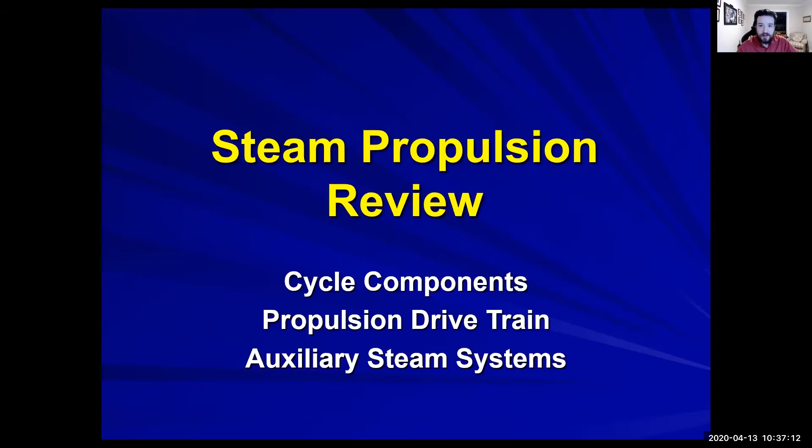All right. So any other questions before I kind of start pushing us through where we're going to go with today?

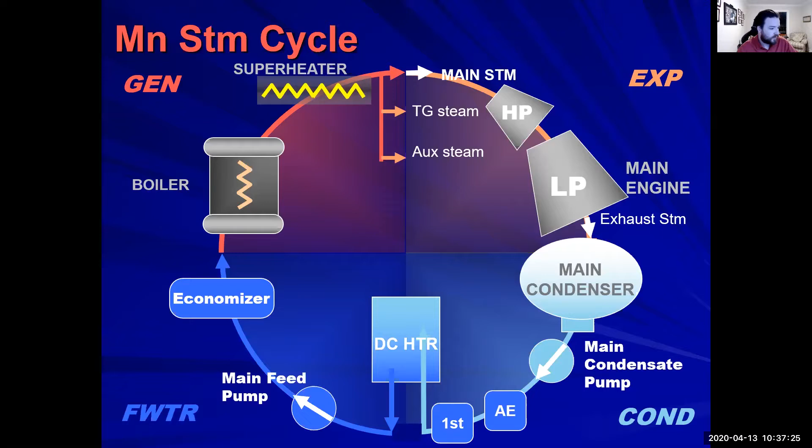So next week's test is just like the three things we just learned. It's not going to be cumulative. So test 3 is going to be 50 multiple choice. It's going to be on Blackboard. It's going to be in the same format that our other tests and stuff have been in.

Now, it's only going to cover -- not refrigeration, I wish. It's going to cover electricity, hydraulics, and steam. All right, so make sure you study up on those three things. I would, if I were you, download all of our PowerPoints that we have already, so that way you have them on your computer and you're good to go with no problems on your end.

All right. What else? I think that's going to be it. That's pretty much it we have today. And then so today we're going to be finishing up with the lesson. We don't have that much left. We have slides 23 to 25. So not a whole lot there.

Expect the quiz Wednesday. And then Wednesday we're going to be doing review for test 3. And then a little bit of information about cruise and whatnot, and what to expect, and any questions you guys may have on that. Because unfortunately, with the school year ending early, where your IDOs and stuff are supposed to take in and talk about this information, they probably didn't have the time to.

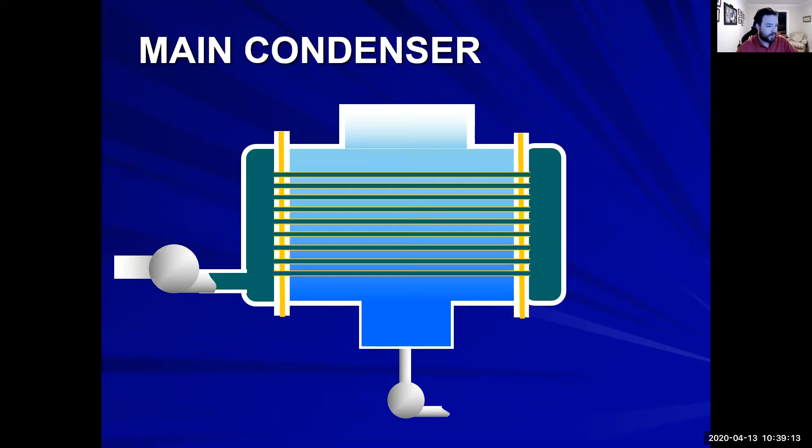All right, so just to review, you have your main condenser, all right, your steam. Oh, come on, where's my pen? There it is. So your low pressure turbine is right here, so your steam is coming through. All right, to keep your head straight on what's happening, you have salt water going from your main circulating pump. You can also utilize something called a scoop, which we do have. And then the salt water goes directly overboard.

All right, it's all gathered into this little tank that's on the bottom of the main condenser. There's an actual level that we try to maintain with the speed of our main condensate pump. All right, this main condensate pump, where are they located? Because we do have two of them. Where are they located in the engine room?

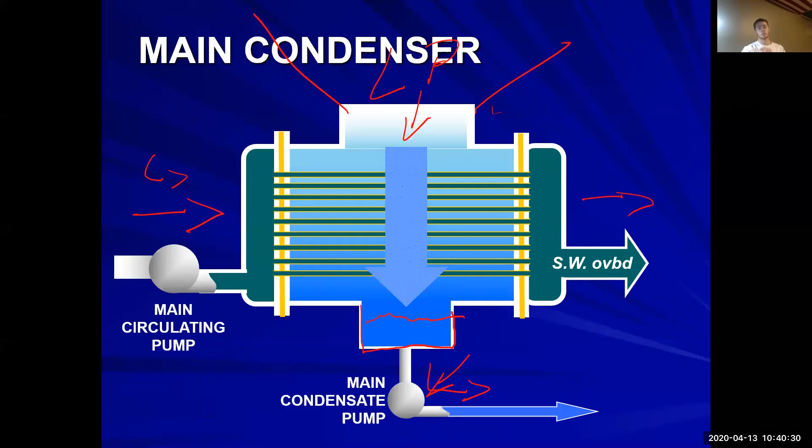Port side, lower engine room, I think. It's not on the port side lower engine room. It is in the lower engine room, but where? Behind the main condenser. Behind the what? Main condenser. What do you mean behind? I'm not trying to be an ass, I just really, that doesn't make any sense on board a vessel.

The opposite side of the shaft. The opposite, okay, there we go. So it's forward. So you have the shaft that comes out here. We have the thrust bearing, which we'll go over in a second. And then you have the main condenser right here. This way goes to AMS. We're in the lower engine room, so there's a door right here, right?

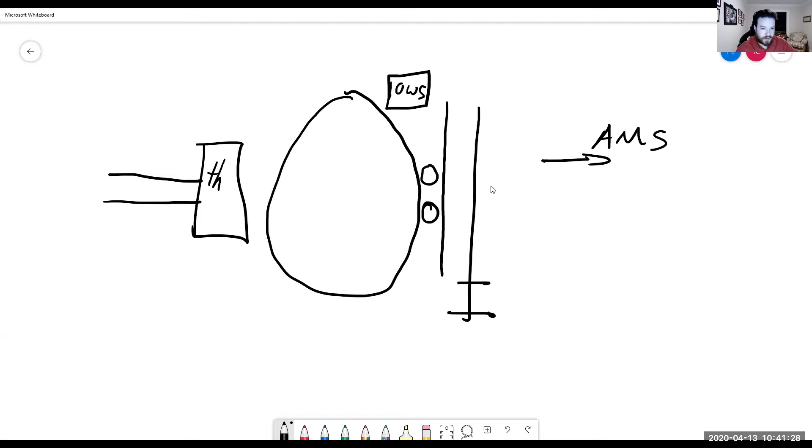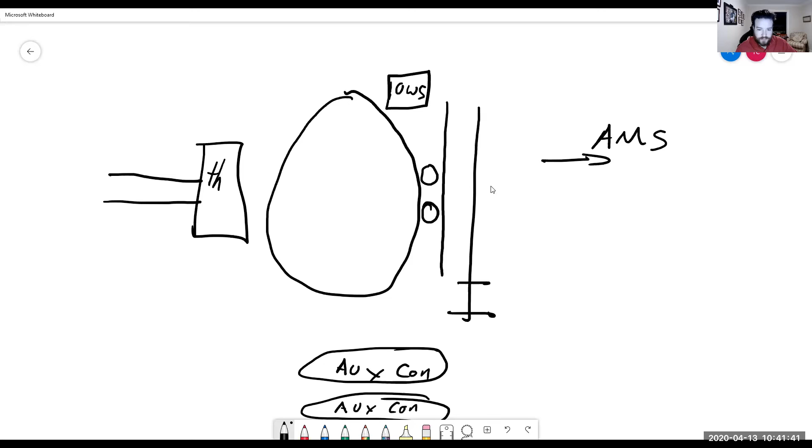And then it is quite literally two pumps that sit right here and here. There's a little walkway that goes right here above it. And then, let's see, we have the OWS over here. Pulling this all from memory. And then we have two auxiliary condensers in the air over here, right? And then we have our feed pumps here, right? One feed pump there, then we have another feed pump, and then we have the import feed pump right there.

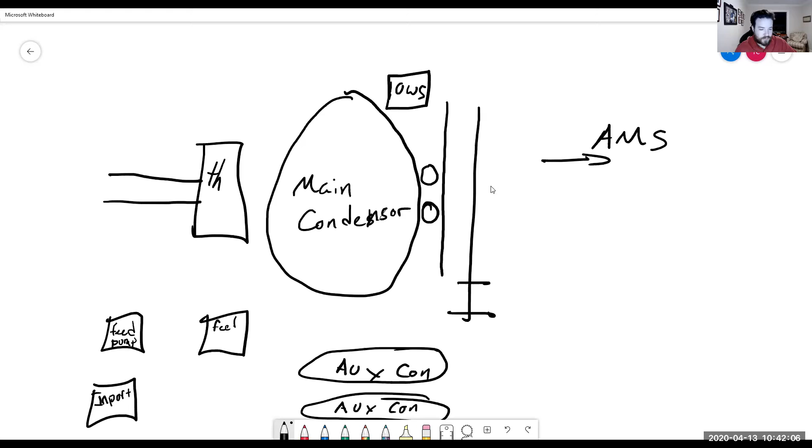We are now a liquid, all right, and we are traveling from the main condenser and we're going into the main condensate pump. We have our air drag line. This goes to the main air ejector, all right.

Does anybody know what was here? Because the main air ejector is not original to the vessel. What did we use before this? Because I'll give you a hint, there was two of them. And there's still, at least one of them is still on board the vessel somewhere.

Does anybody have a guess what we would have used instead of a main air ejector? Like we said, we utilize these things everywhere because they're just fantastic. They have no moving parts. They don't really break. All we use, say again? Something like that. Some sort of vacuum pump or something.

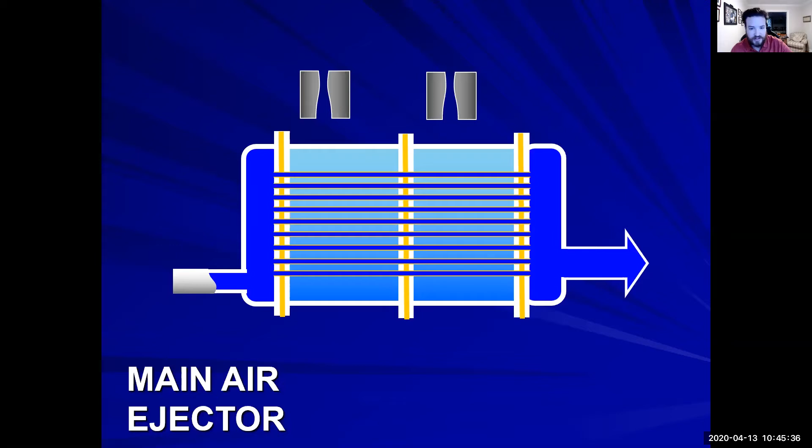So this is coming from the main condensate pump. This is coming from our condenser. This is our main steam line. It's no longer steam, it's condensate. It's a liquid, all right, but it is a hot liquid.

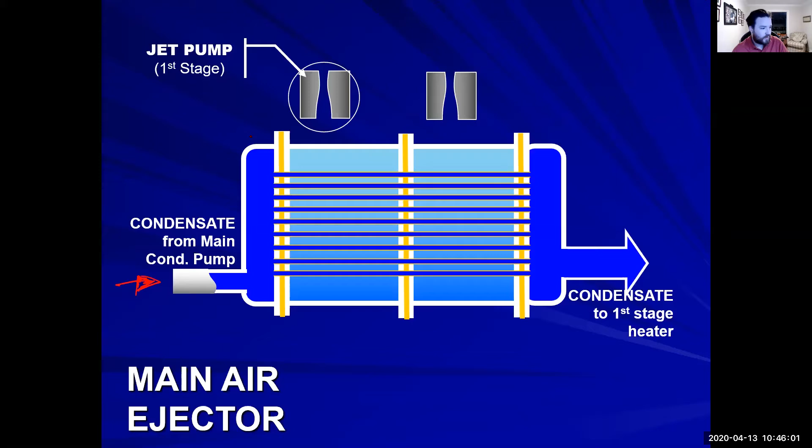What we're trying to do is we're going to try to heat it up a little bit more. We're not trying to cool down our auxiliary steam. What we're trying to do is heat up our main condensate. We're trying to just get as much energy as we can out of it.

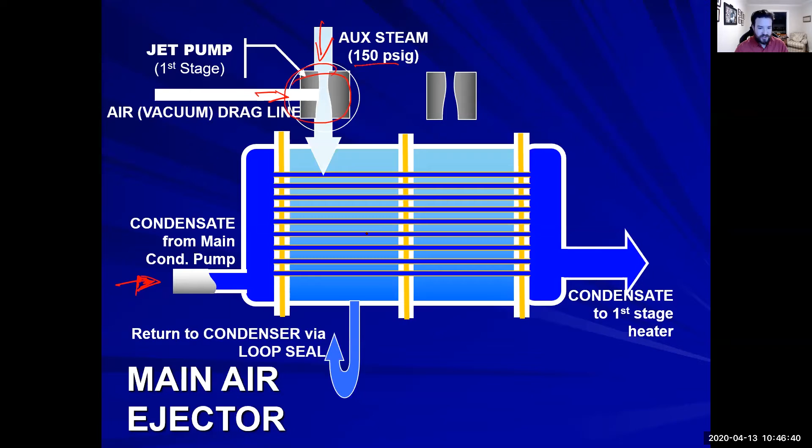So we have our air ejectors. It's utilizing the Venturi effect to drag in any of the non-condensables. We're utilizing auxiliary steam as its prime mover. There's 2 sections of the main air ejector. We have the inter condenser and we have the after condenser, and they're separated via a wall.

So the first portion of it, or the inter condenser, is coming from the main condenser, dragging any non-condensables from the main condenser, and it's pushing it, so now it's all into the inter condenser. It's about 10 to 15 inches of mercury. And then again, any of the non-condensables, so any of the steam.

Say again? Why do you just put this stuff downstairs? No, you can leave it there. Give me 1 second, guys.

The inter condenser is mixed with steam. It has non-condensables and auxiliary steam, 150-pound auxiliary steam. So we want to return any of that steam. It's going to go through a loop seal to the condenser. But we still want to grab those non-condensables out.

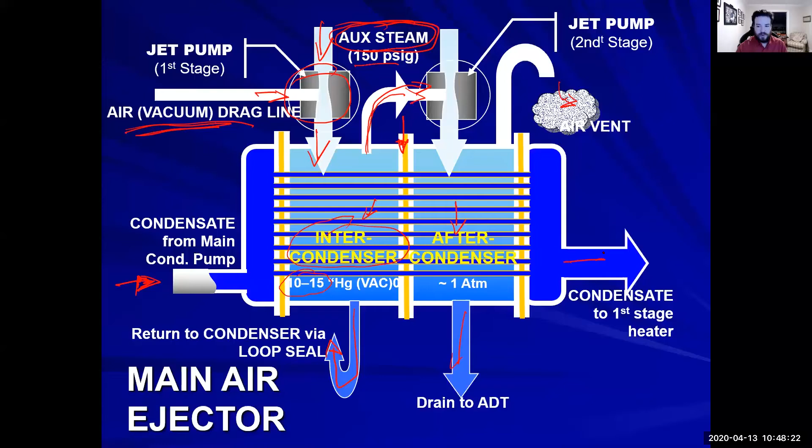So it goes through another air ejector and is pulled out and goes into an after condenser. That drains to the ADT. And any of the non-condensables are pumped out. They go through the air vent. So on the line with our main condensate, it's now heated up a little bit more.

And we go to the first stage heater. This isn't utilized on board the vessel, it's actually bypassed. It still exists, we just don't use it. But it's still important to know about it. So we're coming from the main air ejector.

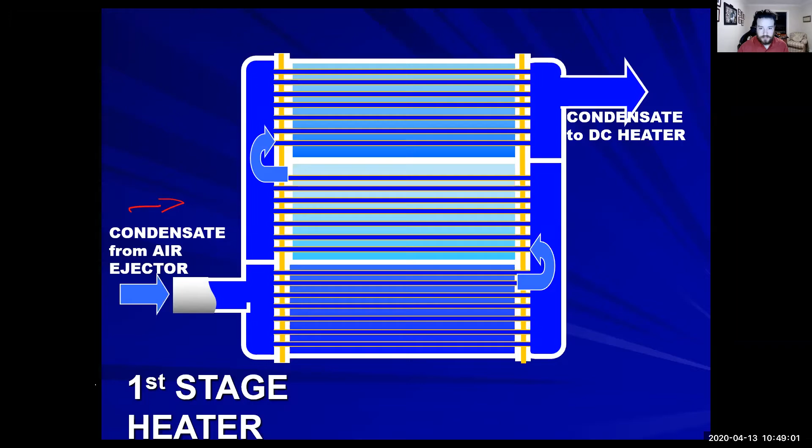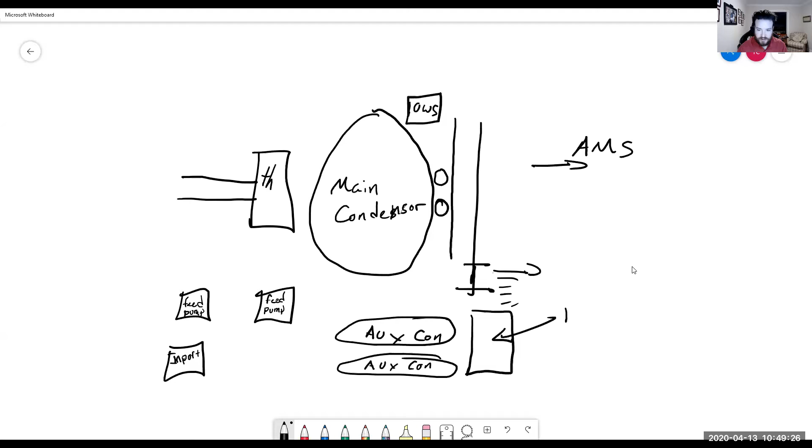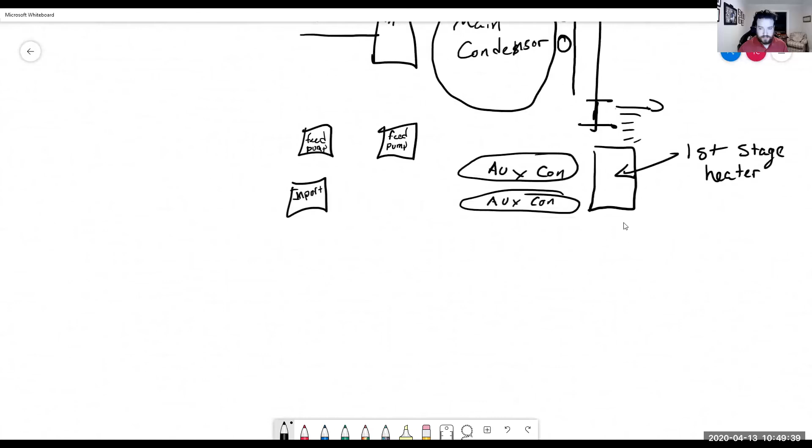What's next to the first stage heater? ADT - that's our ADT tank.

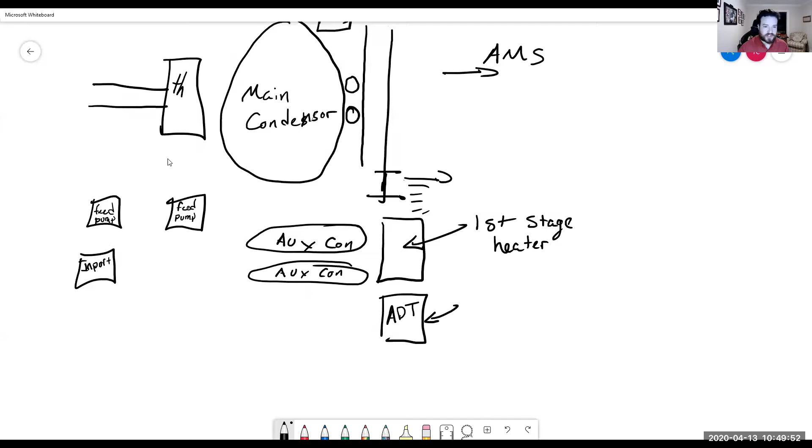Remember what we talked about - always try and keep yourself a little bit oriented on board the vessel. Whenever we're talking about things, like I talk about starboard, and over here is port. A big thing I want you guys to realize is that I've utilized the language that we have to use - use starboard, use port, use aft, use forward. Those words actually mean certain things. And when you go out into the industry, people use those all the time. That's not just something that at Maritime we push just for whatever reason, it's because it's actually used out there. I actually find myself saying it in certain instances of life.

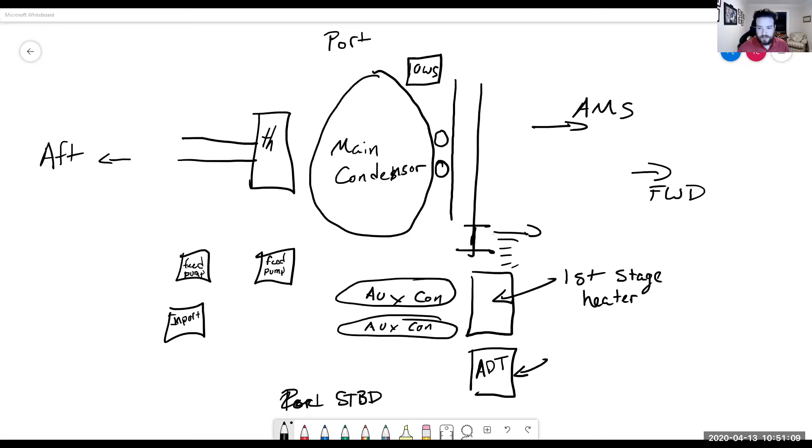So as we go through, we have our first stage heater. Basically, we have 3 heat exchangers in one casing. They are flowing through in this orientation. So it's not just going to flow straight up and out, or cross flow like that - that's not going to happen. It's going to flow - there's a wall that quite literally separates the two. So the fluid is going to be moving through. This is our condensate, and it goes through these sections and through 3 different heat exchangers, basically.

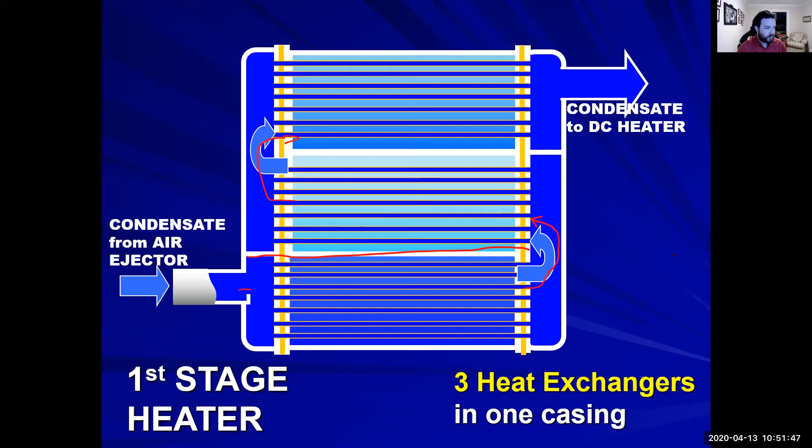So this is the actual first stage in this spot right here, and then this is the first stage drain cooler. So it's basically grabbing steam from certain instances - this is our LP turbine bleed. Any of the extra steam that's coming out of the low pressure turbine is just going to be bleeding off into these areas. And we still want to use that heat from that steam, and that's what this is about. It's just grabbing and utilizing any sort of heat that we can manage, because it's a lot easier to manage heat than it is to create it.

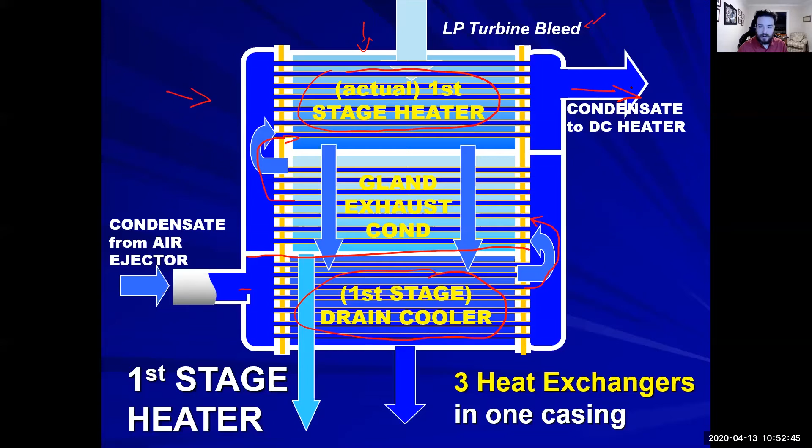Condensate, after it goes through this entire first stage heater, is going to the DC heater. Now, where's the DC heater located? All the way up - that's basically as high as you can go before you hit the stack, right?

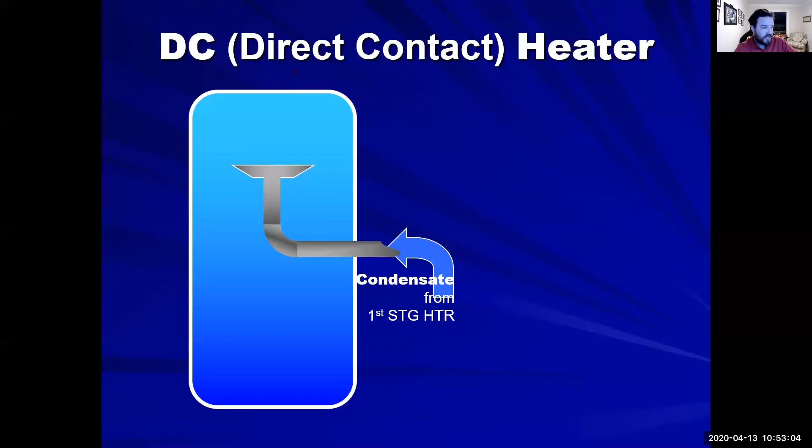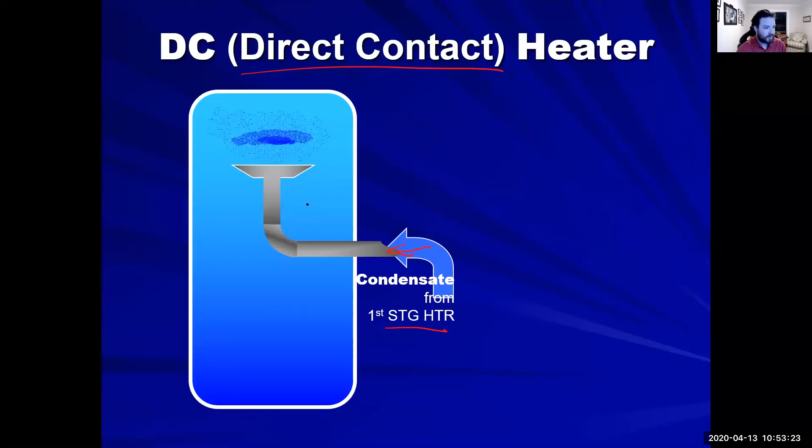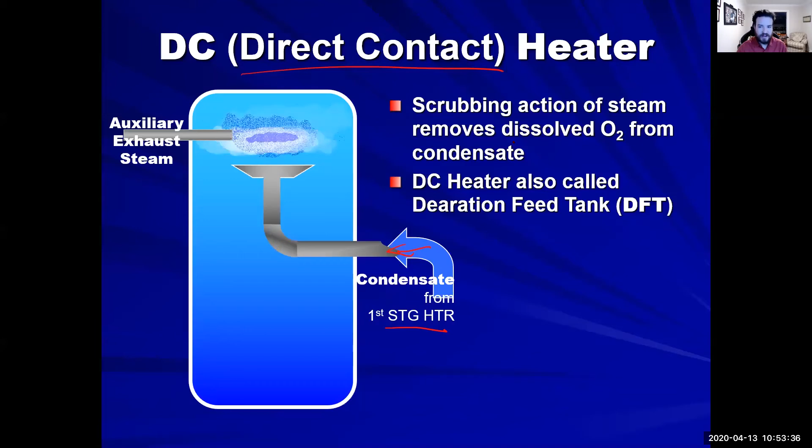So we have the DC heater, otherwise known as a direct contact heater. The condensate comes from the first stage heater all the way down from the lower part of the engine room, and it goes directly into the DC heater. The DC heater is basically a surge tank, but it also is doing one other function - it's a scrubbing action. The scrubbing action of the steam removes any dissolved oxygen from the condensate. The DC heater is also called a deaerating feed tank.

The feed water is at approximately 15 psig and about 250 degrees Fahrenheit. It acts as a surge tank because with different steaming conditions, you want water that can surge up and down. If we suddenly need a lot more steam and need to add a huge amount of water into the boiler, you want a tank already at high temperature and higher pressure, so it goes right into the boiler quicker and we can make more steam quicker. And vice versa - if we need to not produce so much steam while maneuvering, we want to give this the ability to raise up as we use our steam, but we're not producing as much.

It's located high in the machinery space, which provides positive head to the feed pumps. It comes right out of the bottom and goes all the way down into the lower engine room to the feed pumps.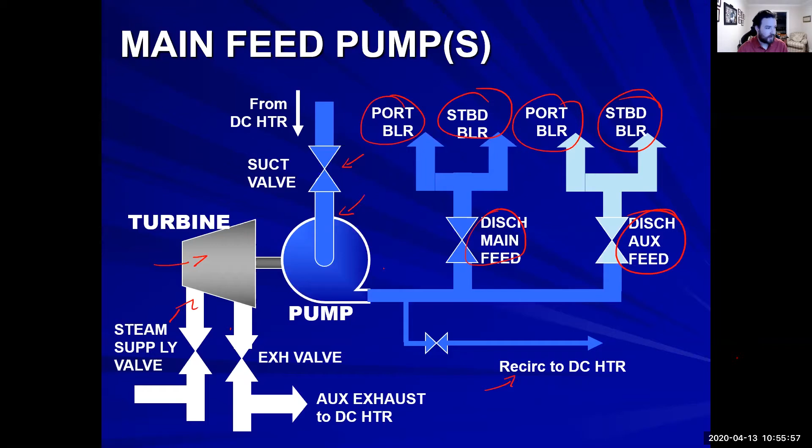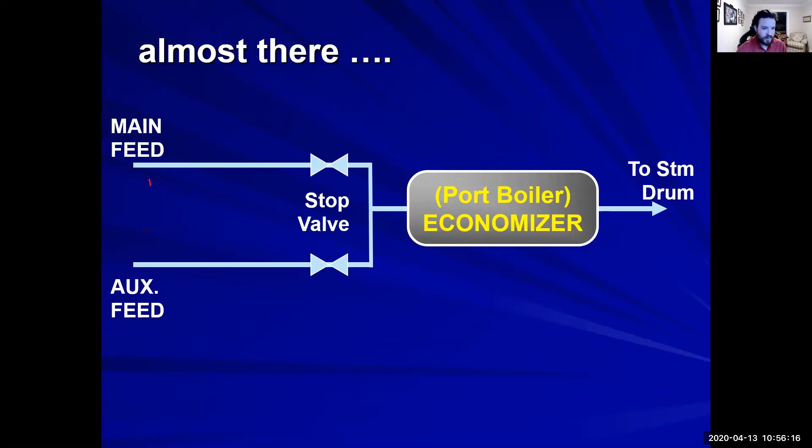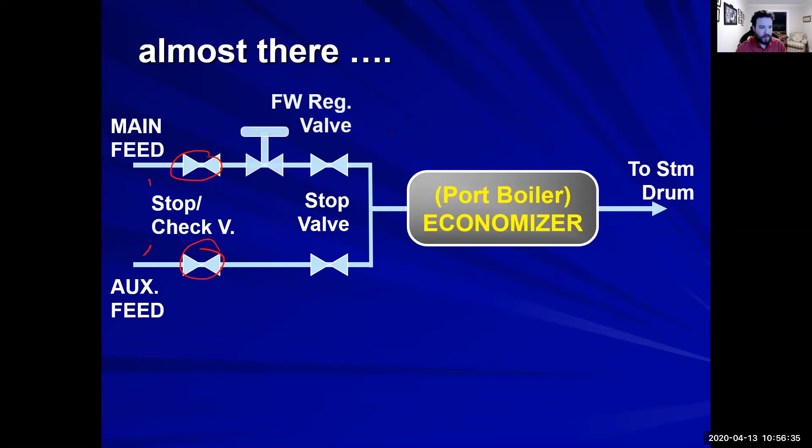As we continue through, we're almost done with the entire steam cycle. We have our main feed and our auxiliary feed. Till they come from the same line - they're basically the same line, but just called two different names. They come in together. We have two stop check valves, so we don't have backflow. And on our main feed is the only one that will have a feed water regulating valve - the auxiliary feed does not.

So we go through the economizer. We have two, one in each boiler, and then it goes right into the steam drum. And we're back into our full cycle.

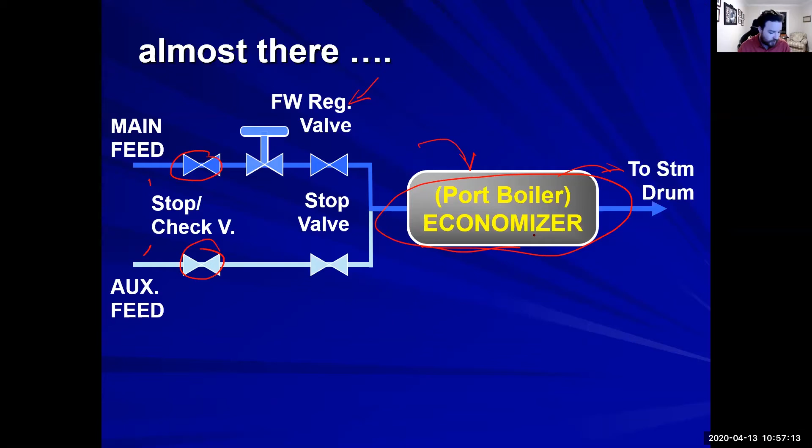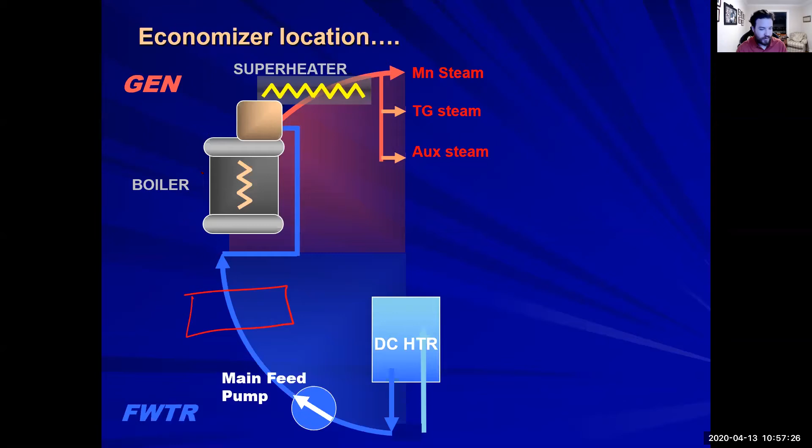So where's the economizer located? In the stack itself - it's mainly physically a part of the boiler. So it's not technically in line here, but a part of the boiler. This highlighted section right here is the economizer.

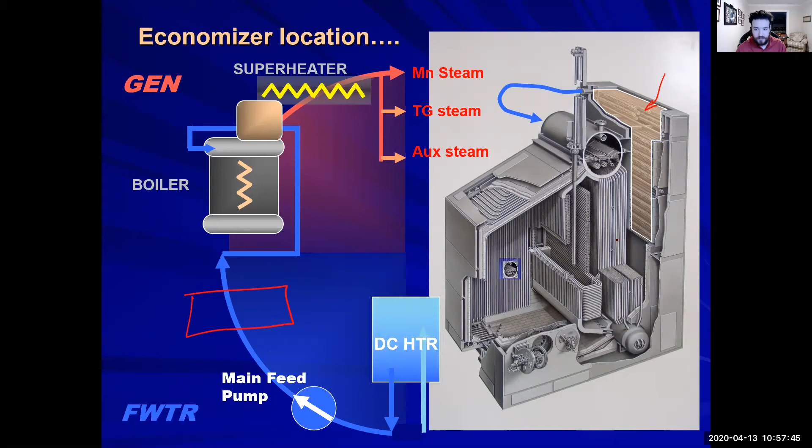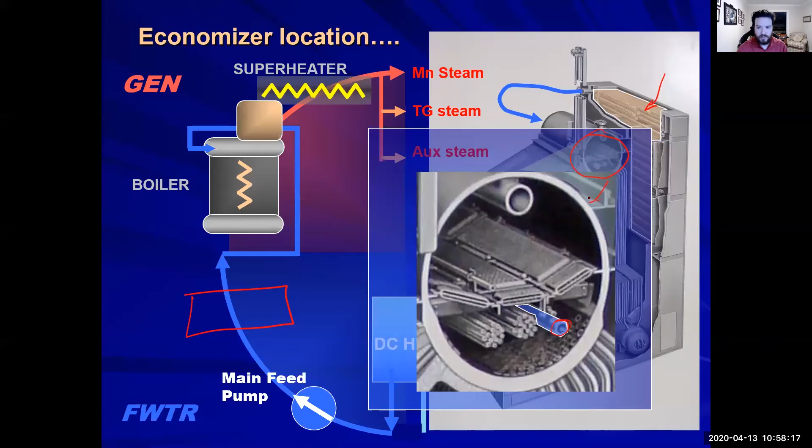And then as we go into the steam drum, which we just opened up right here - this blue pipe that we just highlighted in blue, that is where all of the feed water is going to be entering into the steam drum. Again, it's just to make sure all of the heat that we're putting into the boiler - any heat that we can grab before we put it into the steam drum will give us an advantage.

So that's the main steam water cycle. Before we go into how we use that energy in the turbines, anybody have any questions or anything like that? No? Okay.

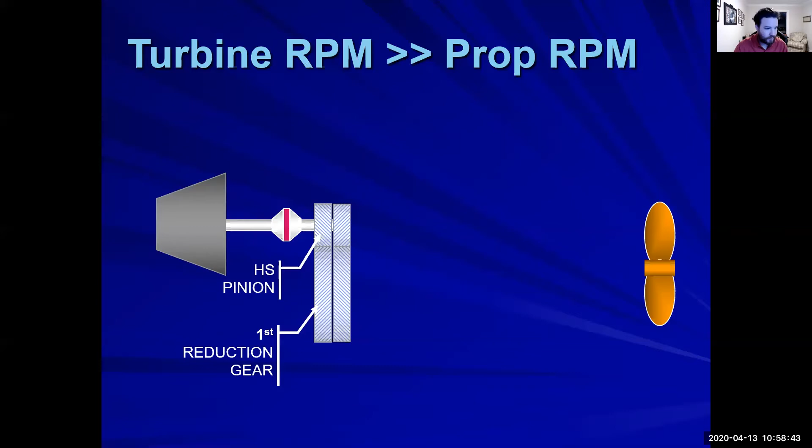So let's go into how we actually use that power, because right now we just have two turbines that are spinning and they're not really doing anything for us. Right now we have basically a double reduction gear. So when you see these HS and LS, basically all it means is high speed or low speed.

Now, these are called pinions right here, and you can see the outline of this one. That's basically what that gear is - the definition is just that it's a smaller subset of a gear. If you were to put two pinions next to each other like this, they would spin at the same speed, but this one would spin in an opposite direction than the other.

So we utilize pinions to reduce the speed, but in turn we get an increase in torque. Because if you had a propeller that was just spinning in the water at high speed with very little torque, it would quite literally do nothing - you would maybe move a little bit. But what it comes down to, especially with larger vessels, is a lower speed propeller - you want low speed but high torque. And that's what we're trying to do with these reduction gears. So we're going to take this high speed pinion and create a low speed but high torque output.

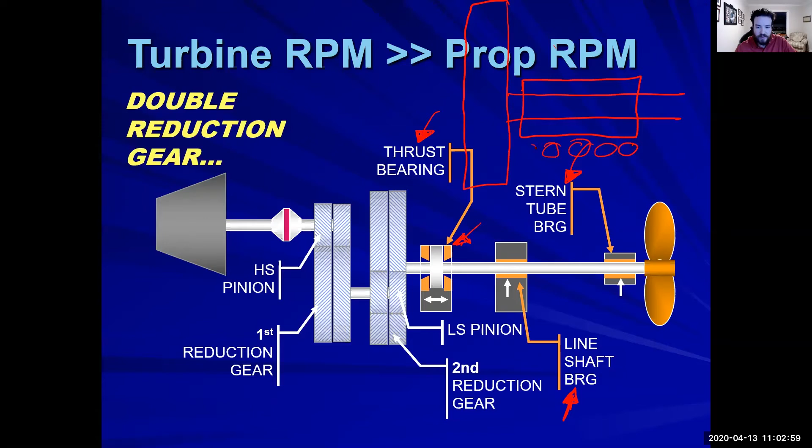Take a look at it. You have the main reduction gear that's quite literally right up against it, and you have your main shaft coming out of it. And the amount of bolts holding this thrust bearing to the ship is quite insane.

The bolts themselves are about that big, and there's so many bolts and nuts holding it to the vessel. They have to take all of the force that's being produced and pushing the vessel. This is the spot that it's actually pushing the vessel on.

Now how do you fasten those bolts though? They're that big, so what you'll use is basically a torque multiplier. A torque multiplier works on the same principles as reduction gears.

So say you have a nut, a square nut, that needs to be tightened down. What you'll utilize is another nut that's been tightened down, or something structural on the vessel, and you'll put your socket on top of it. So if you're looking sideways at it, you have your socket on top of the nut, and it comes up like anything else.

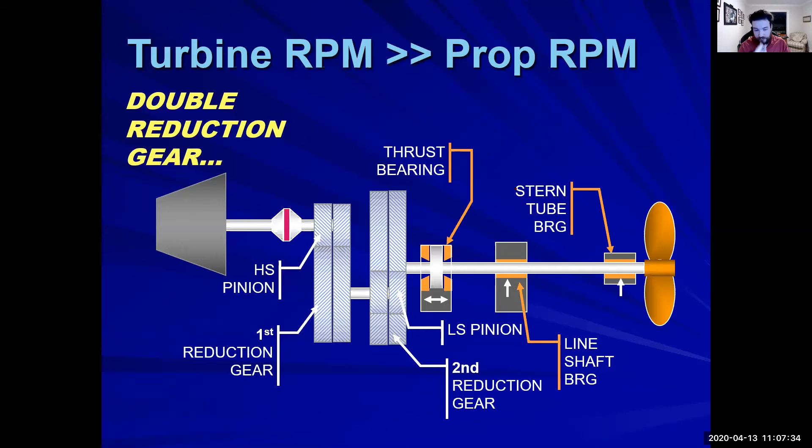So double reduction gears are utilized on the TSES, and we use them twice. With those letters we were seeing, we have a high pressure, and that's talking about our high pressure turbine. It's a high speed turbine, so because it's directly attached to the high pressure turbine, it's going to be moving really fast, but not a lot of torque.

And its pinion goes to its first reduction gear. That reduction gear is directly attached to another pinion. That pinion is still the high pressure pinion, but now it's a low speed pinion, moving a lot slower because you're taking an input that is high speed, small diameter. And that smaller diameter has to spin, let's say 10 times, to get one rotation out of the main reduction gear.

And that main reduction gear is directly attached to another pinion that will have to spin 10 times in order for it to move what is known as the bull gear. It may need to spin 50 times in order to move the bull gear 1 time. These aren't correct numbers, 10 to 1 or 50 to 1 isn't correct, but that will give you an idea of how much these pinions need to move in order to get 1 rotation out of their reduction gear.

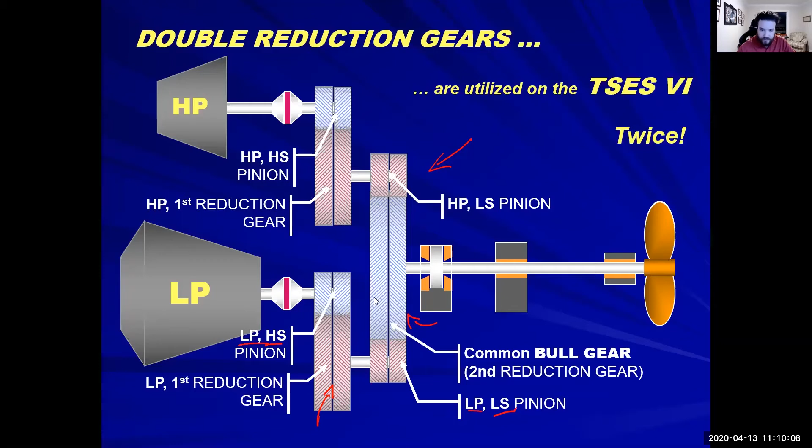So any questions on this, on what's happening with these double reduction gears? One thing I want to show you that I found online.

Question: is the high pressure reduction gear bigger than the low pressure one because it spins faster? What you're trying to do is gain the same speed and the same torque out of both. It's not going to be exactly the same, so the speed and the gearing ratio is going to be different, but it all comes down to what's going to be happening in the second reduction gear pinions. I don't think one is bigger than the other, but I know its gearing ratio is different.

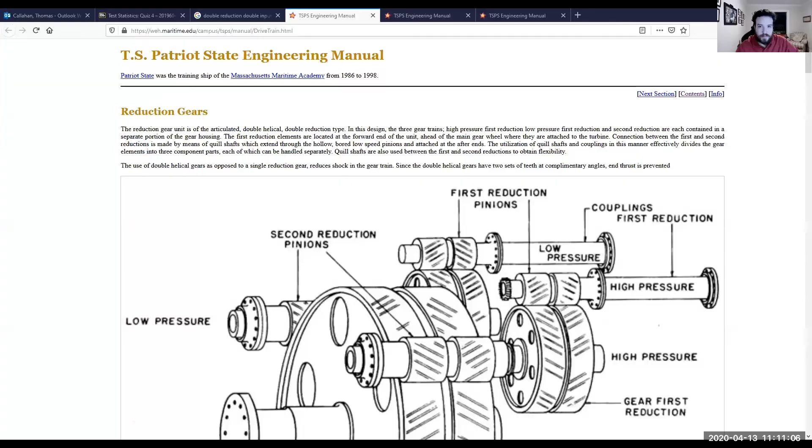So let me go into screen share, and there it is. I'm going to put this up on Blackboard as well. This isn't perfect because it's coming from Massachusetts Maritime Academy, but it is our sister ship, so certain things may not be perfect, but it is a good manual.

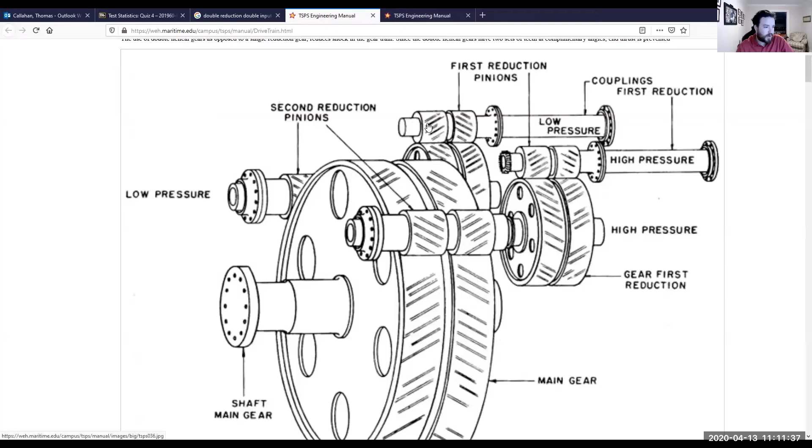Now this one, if you could see, is what our setup is. We have our high pressure pinion and our low pressure pinion going into our first reduction gear. Then it goes into our second reduction pinions, and then it goes into our main gear or our bull gear. So you could see the difference in size of the actual reduction gears, which are, there's your actual answer.

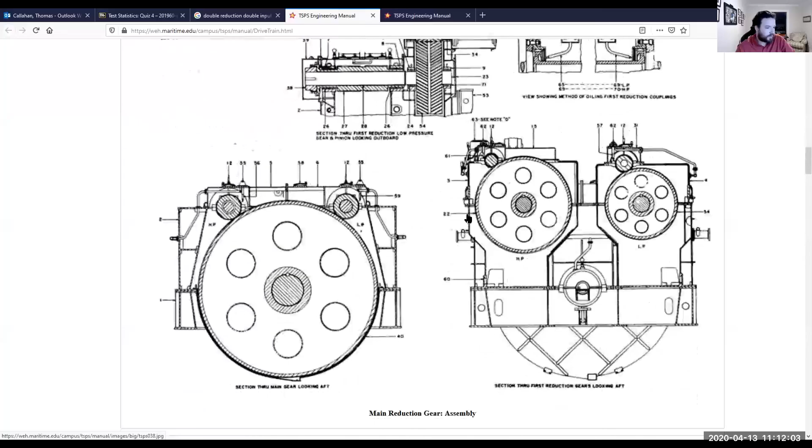But it is very good information in there. I know it's the blue book. Have you guys, do they still sell that book in the ship store? Because there's the green book and then you have the blue book for the engine side. Were you guys told to buy that by anybody? Which blue book are you talking about? There is Practical Marine Engineers, the TSES Empire State. TSES, do they still sell that? What I have is white, it's like the pony book. Not the pony book, I'm not talking about the pony book. I think they had a few copies, but no, that's the Practical Marine Engineers guide. They had a few copies, but when I went to go look, they didn't have any left. Because they had the green book, which was the electrical for the TSES, and then they had the blue book, which is usually told to you guys to purchase. But you guys also don't have certain classes that I used to have.

Okay, what the hell just happened? There we go. All right.

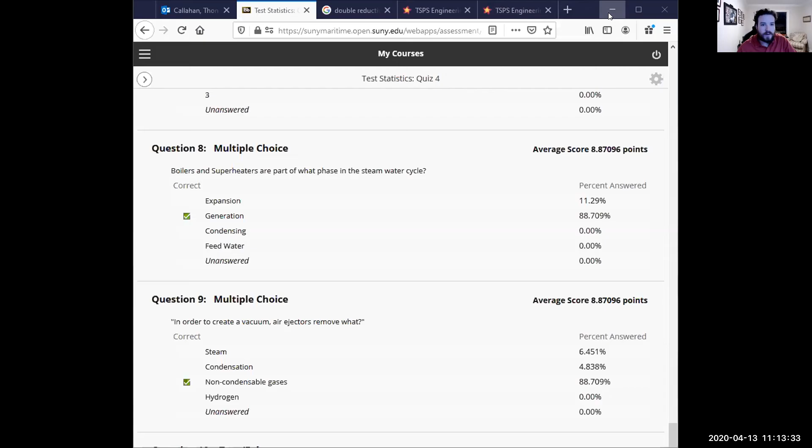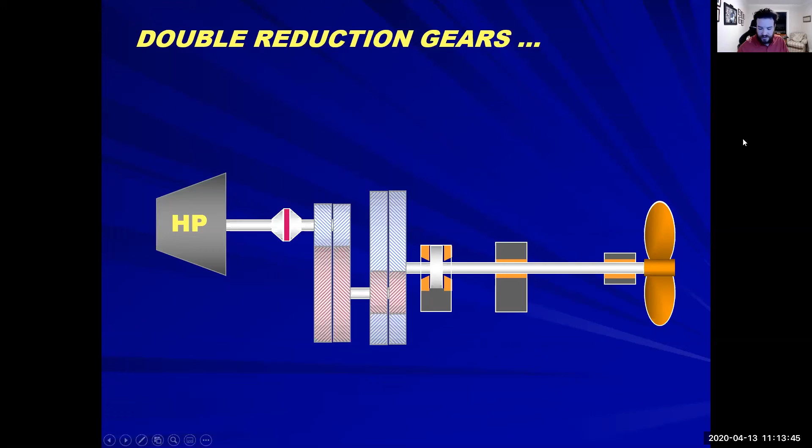So not every vessel has double reduction gears, or what we would have is the high pressure, low pressure turbine set up like this.

Now these are like electric drives. Then we have basically, this would be like a jet engine, so it's a gas turbine. This is representing the stack, goes to a pinion and goes right to a reduction gear, and that goes into a generator. And these represent other generators. They go with their electrical lines right into the motor, and the motor will basically go at whatever speed is needed, whatever RPM is needed at that time.

We could also use them with diesel generators. Doesn't have to be a gas turbine.

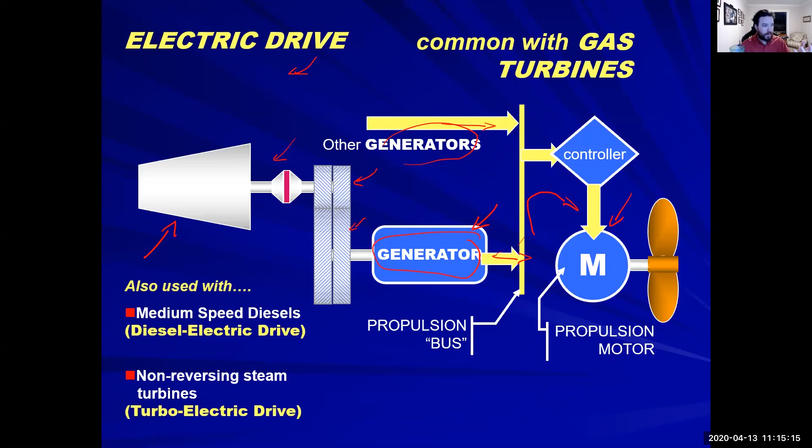The non-reversing steam basically just keeps constantly going, it's hooked up into a generator, and that generator is producing electricity to go to a motor. So you're not directly utilizing your steam energy for your propulsion, you're doing electricity to do your propulsion.

So the generator moves at a constant speed then, or the turbine or the diesel engine. Yeah, so all of those are going to be running at a constant speed, and they're not going to be going up and down. They might have little fluctuations with load, but they'll all either run at 1800 RPM or 1200, depending on their rating, producing electricity at a constant rate.

And then it's up to the controller and whatever signal is being pushed out from the bridge to say, hey, I want 18 RPMs right now or 12 RPMs or whatever they're trying to do up there.

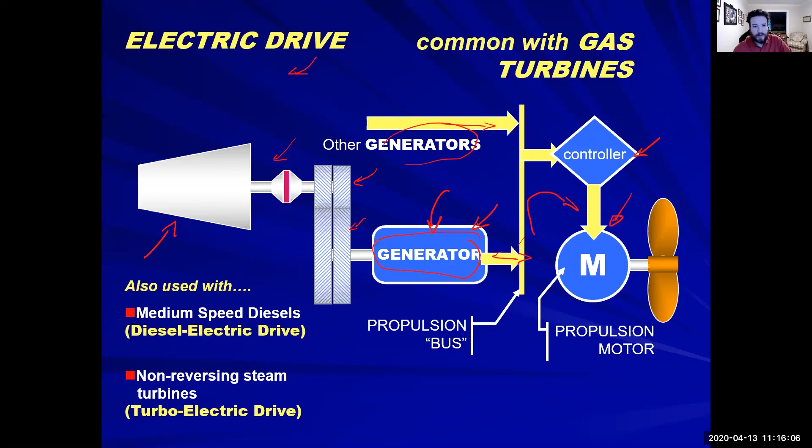So we know that on our vessel, the TSES, there is no direct control from the bridge. They have a throttle up there, but it's not connected to anything down in the engine room that will directly control how fast or slow the ship goes. It's called an engine order telegraph, or an EOT.

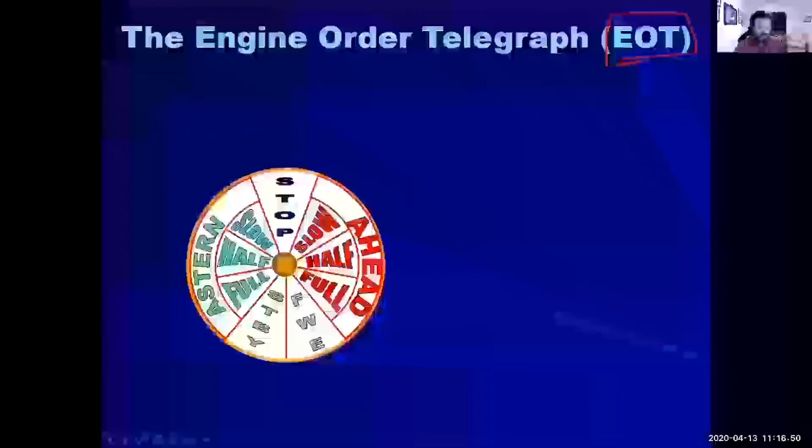And these EOTs look like this. What they're doing is they're asking for a certain RPM. So their telegraph up on the bridge, ours does not look like this, but we basically are receiving orders from the bridge. They go and they'll basically say, hey, we want slow ahead, and they'll move this bar across, and there'll be a smaller arrow.

You can see it right here. So there's an arrow in here, and that's what we're going to be controlling down in the engine room.

So if they move the EOT, they will show that they have, hey, we want slow ahead, and we have to match it. This will ring to let you know that the bridge wants a different speed. You will basically take the engine order telegraph and change the arrow location to match the arrow, saying, hey, we acknowledge that you want slow ahead. That's all this is, an acknowledgement of what they are asking for.

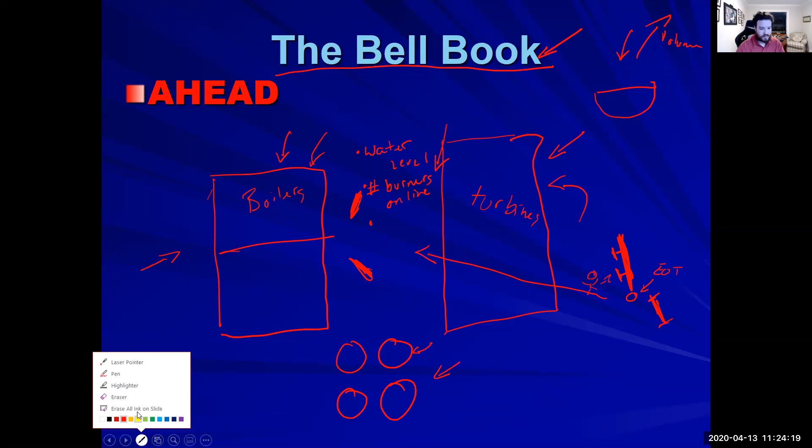That's the importance of yelling across the engine room. And don't be afraid to yell. If people are having conversations, it doesn't matter, you just yell it across the engine room.

So we have the bell book. Basically, you have these different symbols that you would have to write down, because you can't just take and write these words down really quickly in a small bell book. When you're maneuvering, you have just a few seconds to write these things down.

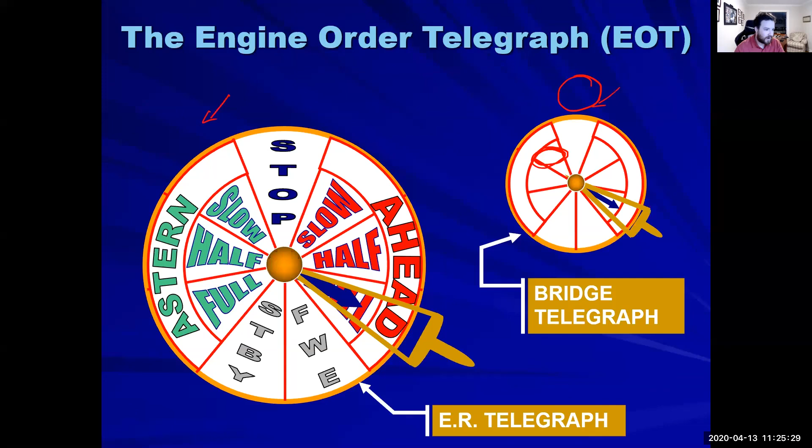Let's do 33. All right, we'll finish up the rest of this on Wednesday.